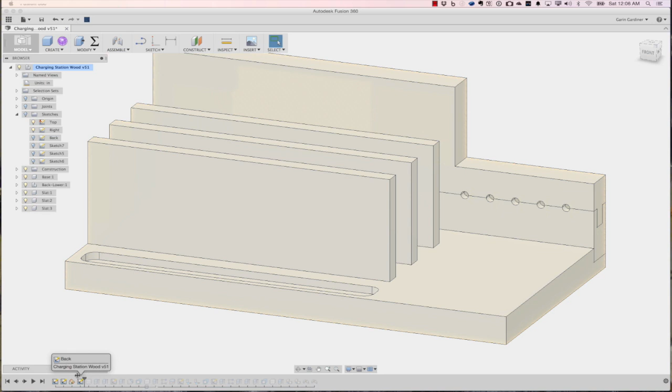First, we'll just roll this back to the beginning of my design. I started out with two sketches, a top and a side sketch. And this controls everything, like the thickness of everything.

If I want to change the thickness of my boards, I have a parameter in here. Let's say we go from 0.75 to 1 inch. You'll notice the width gets wider, the cutout also updates. Everything changes. If I go back to 0.75, everything updates again.

So it's a pretty cool way to set things up. I have sketches that control all of that, and it's pretty nice.

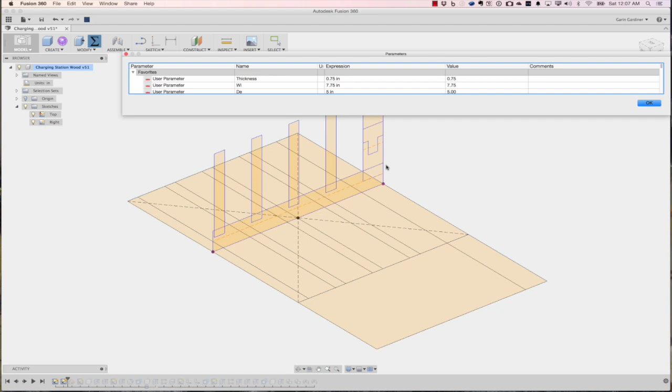But at any rate, I have my couple sketches that control everything, and I'm just going to close out of this and step forward and see my design.

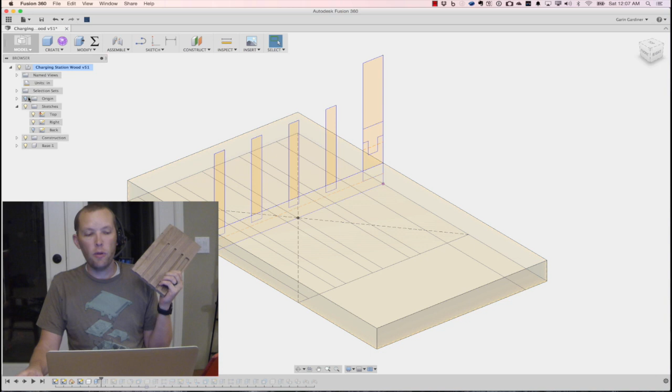So I started out wanting to build this, which you can see I actually designed and built. As I step through here, you can see that I created the base feature, extruded out the slats, a front slot, and put a fillet on those edges to smooth it out.

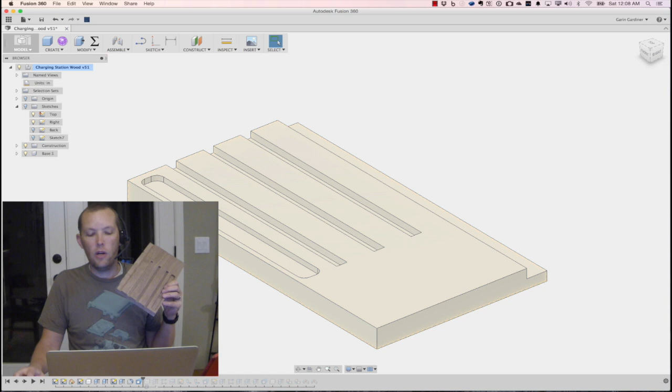Didn't mean to play it all the way through, but that's all right. So we can see the slats, extruded all the way through. Then from there, I wanted to be able to add a back, split that into a top and a bottom, and put some holes through it.

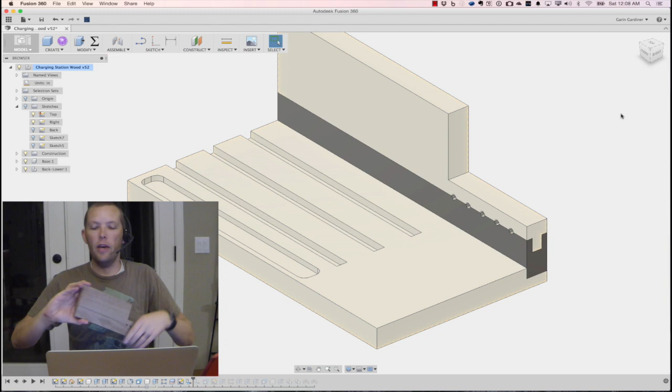You'll notice I have a little groove there—I want those things to snap together, so that groove just snaps kind of nice and tight. And then around the back, let's rotate this around.

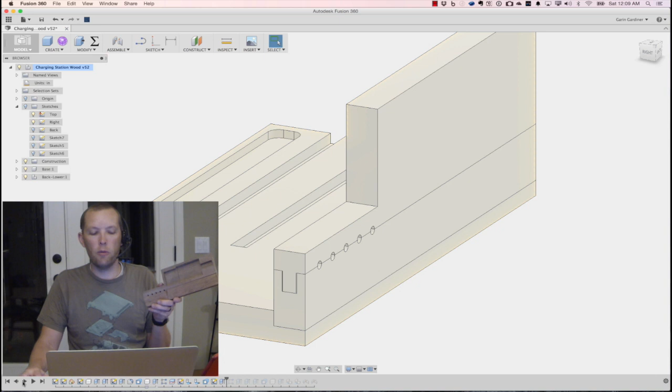I do have wood grain, it's just easier to see it white, so that's why it's white here. I also did a little offset for that tongue and groove so it can fit in there a little bit better—it was a little tight. I did some sanding, so if you make this, you may want to make some adjustments there, but it wasn't bad. I just sanded it, but I want it to still be kind of tight.

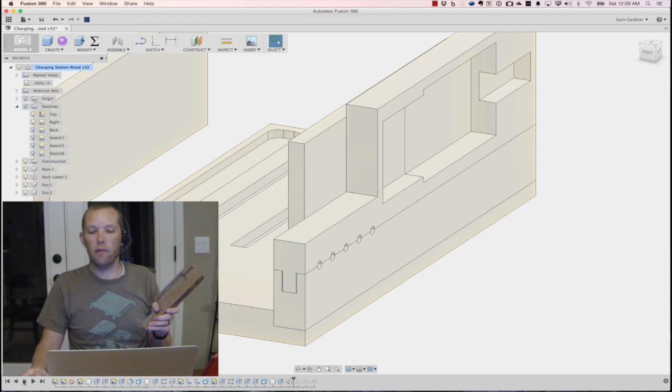So then I pocketed out the back for where I put my little—oh, there it is—for this to fit in, have room for the USB, and room for the charger or wall cable. As I advance that, you'll see I have all those pockets, with the slats in there.

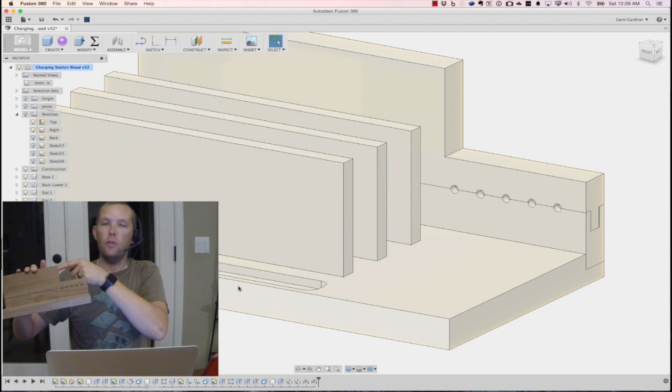So that's pretty much the design. The idea is, with this in place—obviously I haven't nailed it all together—you have your device in here, you have the cable that comes through the hole into the charger, but I wanted to set it up so that when you unplug it from the device and let go, it recesses back.

I played with a lot of options. I've got a couple prototypes, and without getting really sophisticated with bearings and crazy things—I'm sure there's an easier way to do it—I kind of struggled with a simple design other than the old medieval counterweight.

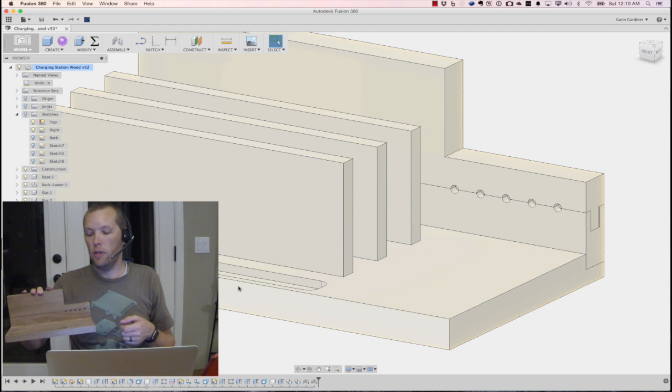So the idea, which I haven't done yet, we'll see how it goes: have the cable go through, have a counterweight here that's pulling it down. As soon as I let go, it's going to pull it back—I'll probably put some rubber stops there, but it comes and stops. I can pull it, plug it in, probably have a good 12 to 18 inches to plug it in, with the counterweight back here.

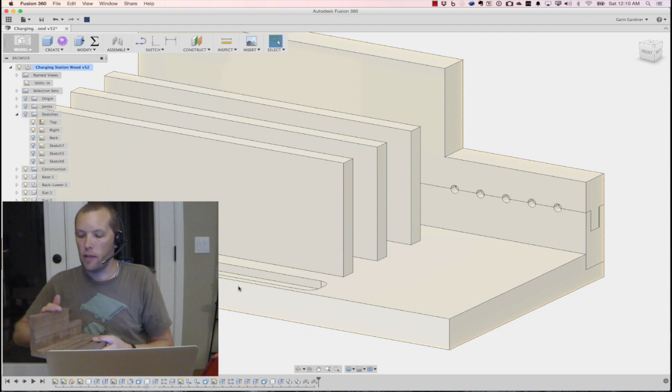I think that'll be a really simple way to solve that problem. We'll see how that goes, and I'll give you guys an update as soon as I get it all together. But that's the idea of the design here.

You can see, as I mentioned, all the different features—you guys can take a look at that. I'll share the design so you can download it and upload it to your own project if you're using Fusion 360.

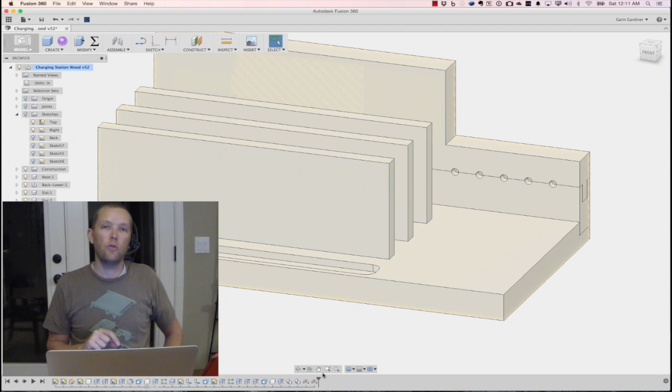In a moment, we'll actually jump over to the CAM side, and you'll be able to see all the toolpaths and even create a toolpath so you can see how to do that. Then we'll send that to the Shapeoko so you can see the process to get it from Fusion over to your CNC tool.